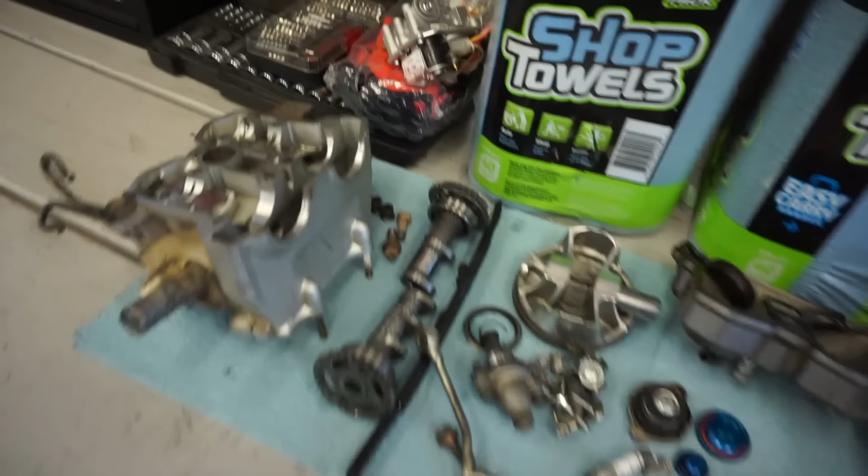Alright, parts finally came in for the 2005 Yamaha YFZ450. If you guys don't remember last video on this thing, we picked this thing up for, I think it was $1,500. Pretty good deal. The guys knew me and they gave me a pretty good deal on it, which was nice of them. They didn't, however, tell me that there was coolant in the oil. And later we found when we tore it down that the cylinder was cracked. So tons of coolant was getting into the engine.

You can see the big crack in the cylinder right there. This was a big bore CP piston. It was just rebuilt, I believe, a couple months ago. I'm not sure what happened, but something happened and the cylinder cracked. So we are going to rebuild it today and see if we can get this thing started for the first time since owning it. We got a brand new kit here.

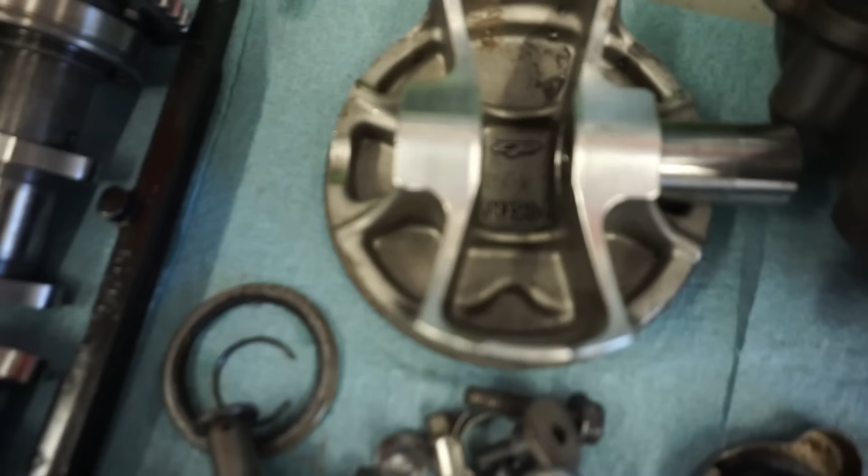It was like 400 bucks for a CP piston. This is the stock bore, 95 millimeter stock bore. You can see that the big bore piston was a 98. So this is 3 millimeters less. We didn't go with the big bore because we measured the cylinder last time and the cylinder wall was so thin that I wanted the stock one just because it was a little bit stronger.

Look at this guy checking out the piston. Do you approve of the piston, Vinny?

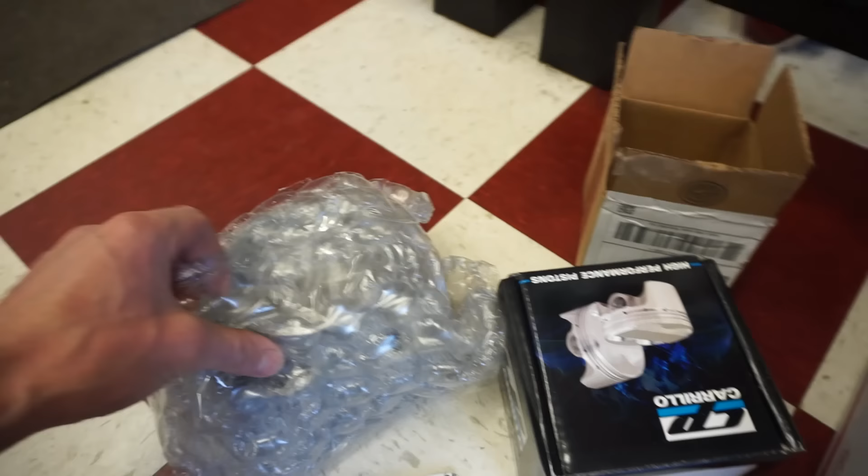And then we got the cylinder and a gasket kit in here as well. Cylinder is actually really nice. I did not cheap out on the kit. Then we got the Cometic gasket kit as well. So that looks pretty good. I don't know why it says 96 millimeters on the gasket kit. That's kind of weird. But here is the cylinder.

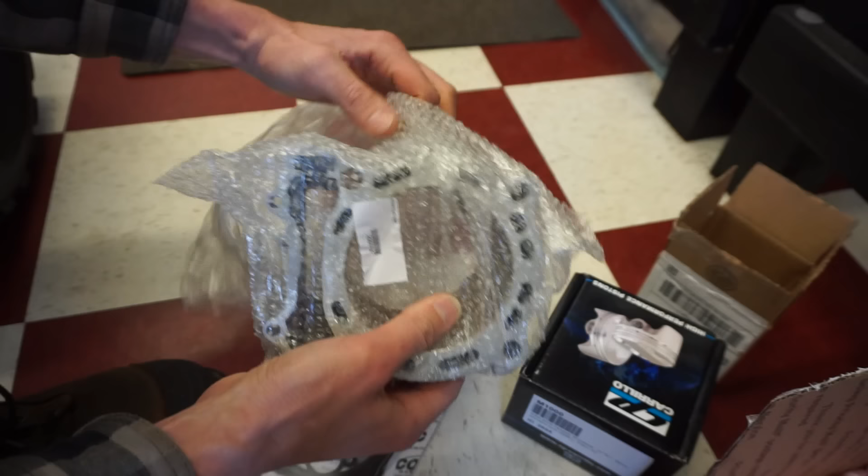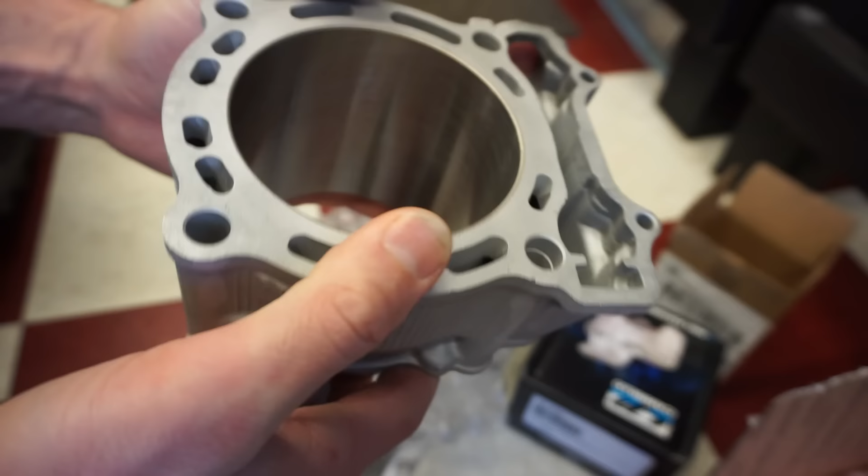The kit came with a really nice cylinder as well. It's not one of those cheap ones you find on eBay for like 100 bucks. This one is actually like $400. Hopefully they sent the right one. Yeah, it's a Cylinder Works cylinder. So it's definitely a nice cylinder. I believe it's already honed out. Yep, you can see all the lines on the cylinder, so that looks really good.

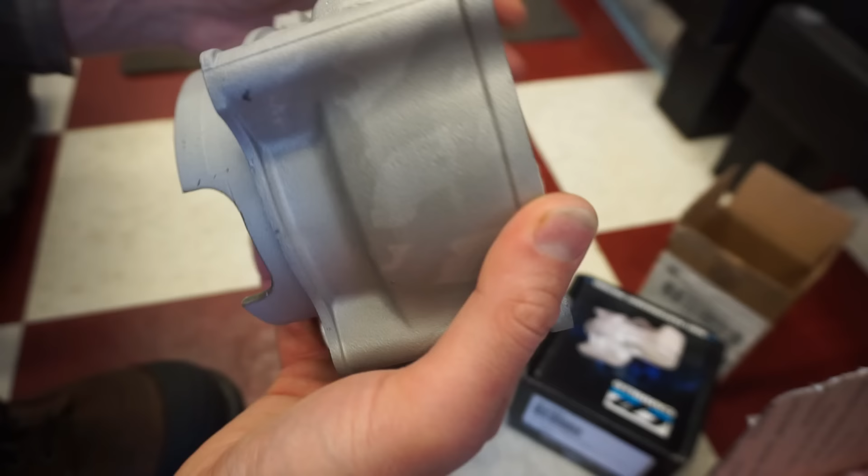And look at the difference between the thickness of this one and the other one. Those walls are so thick. There's no way that's gonna crack. Knock on wood. But that looks really nice. And you can see it actually says Cylinder Works right there. Made in the USA. So you know it's good. So we'll measure the ring gaps and all that fun stuff and get this thing rebuilt. I'm guessing we're gonna have to adjust the valves as well and shim those, but we'll see.

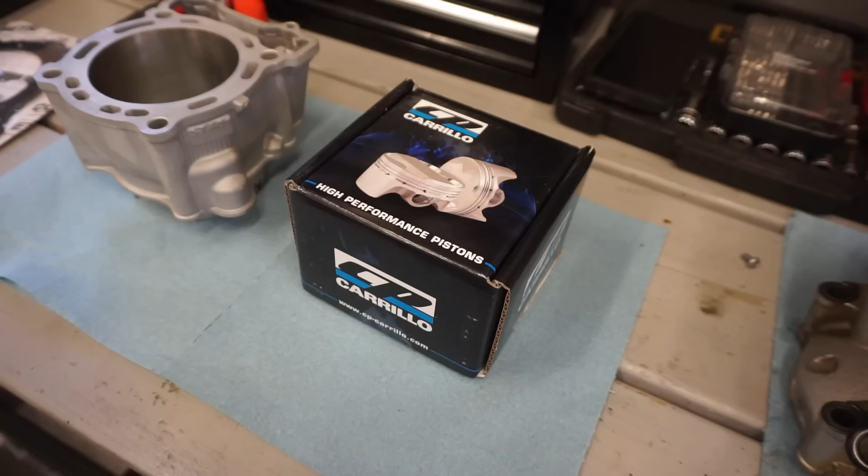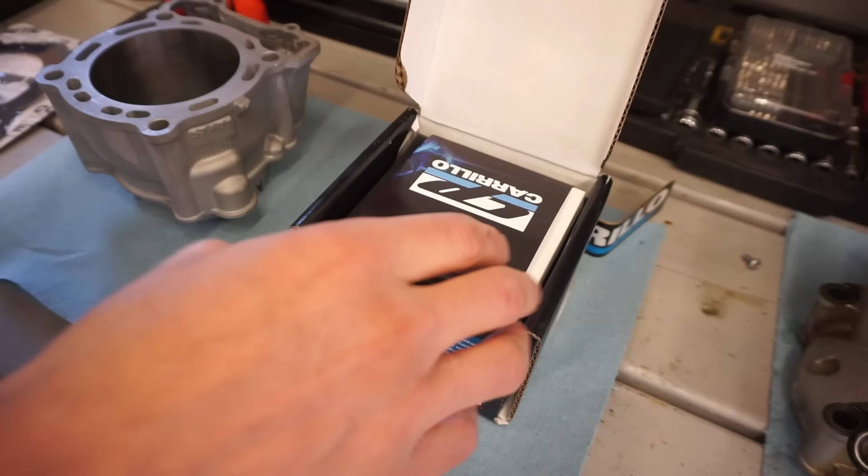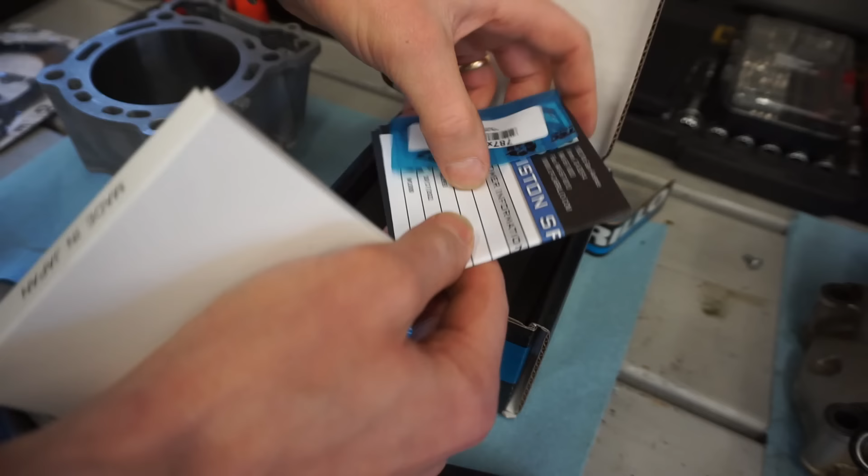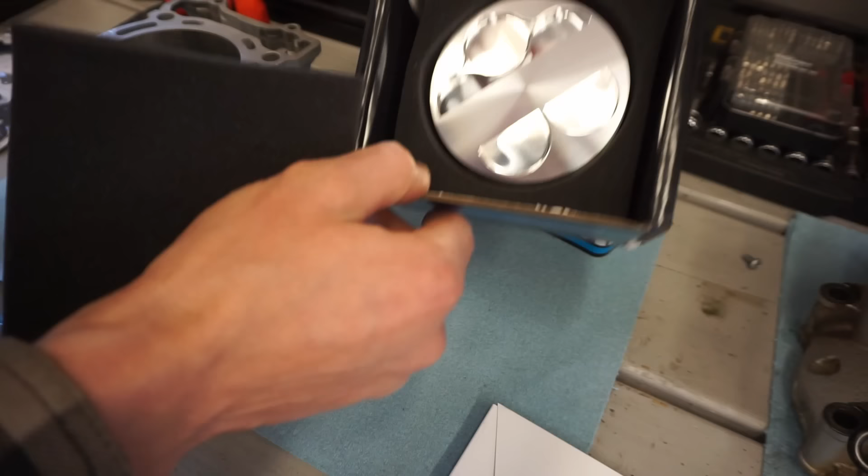All right, opening up the CP piston here. Take a look at this one. Hopefully everything looks good in here. Got the nice sticker. Little packet here. Here are the rings. The rings. There's the piston in there. Looks pretty nice. That is a pretty piston. It says MX94 on it.

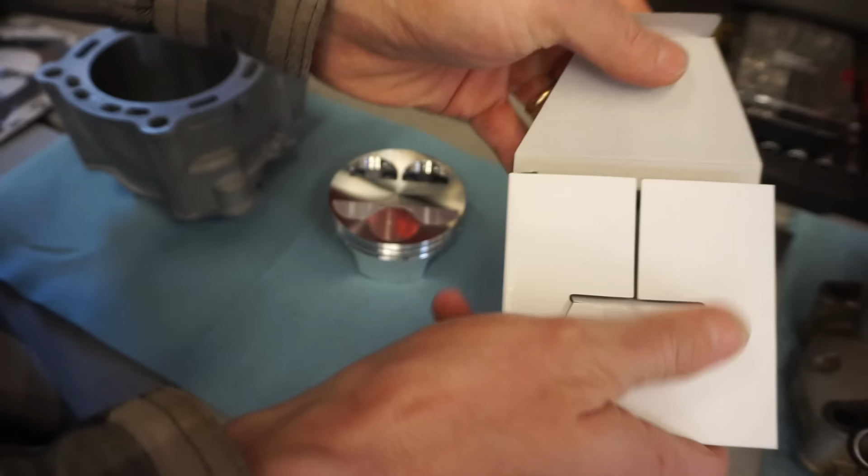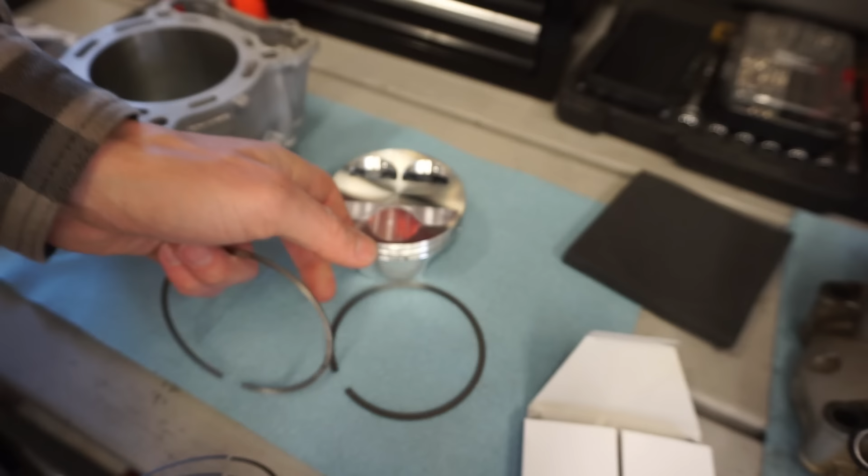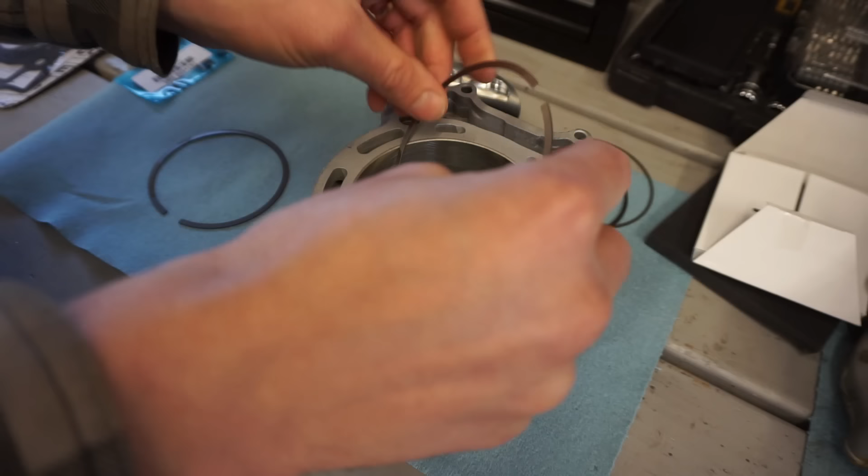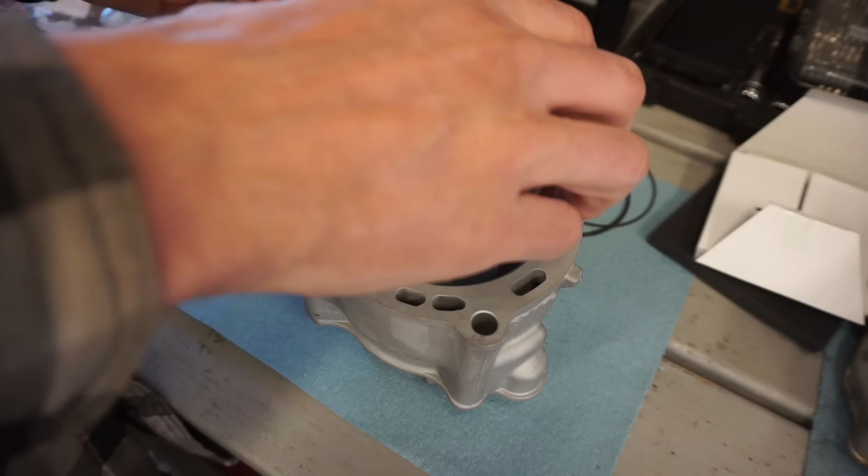So the black ring right here is actually the second ring. And then the piston colored ring is the top ring, and then the oil rings right here. So what we're gonna do is take the cylinder and just measure the ring gaps here quick, just to see what they're at. We'll do the top ring first. Stick that in there. What you do is use the piston. Push down those rings a little bit.

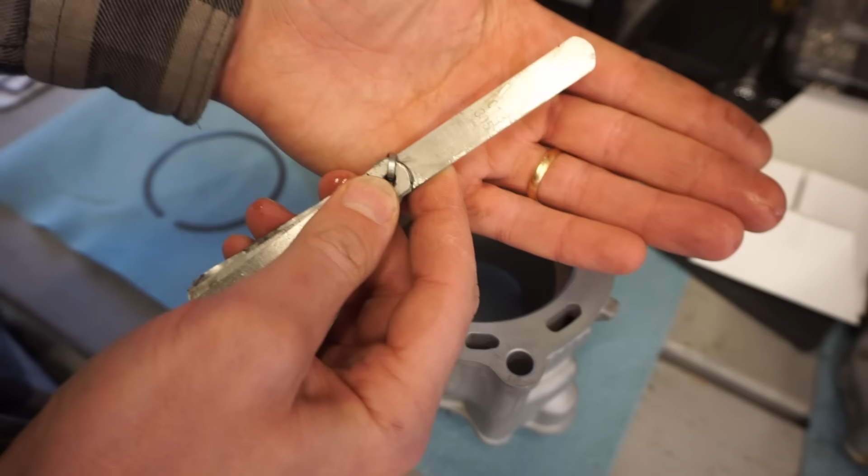And you can see the ring gap right there, so it's nice and tight. See that? Little gap right there. Get our feeler gauge out. This one looks pretty tight, so we should be good. It's gonna be like 12 thousandths, I bet. Yep. Wow, that's almost perfect. So 0.305 millimeters, or 12 thousandths of an inch, is what that ring gap is at. That is pretty much perfect there.

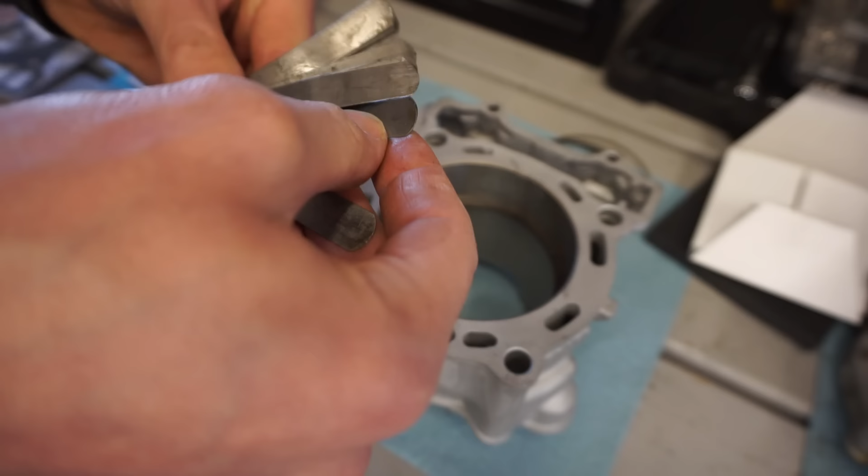Second ring going in. So it's bigger than 12 thousandths. It might be like 15 thousandths of an inch. A little bit bigger. I think it's gonna be 16 or 17.

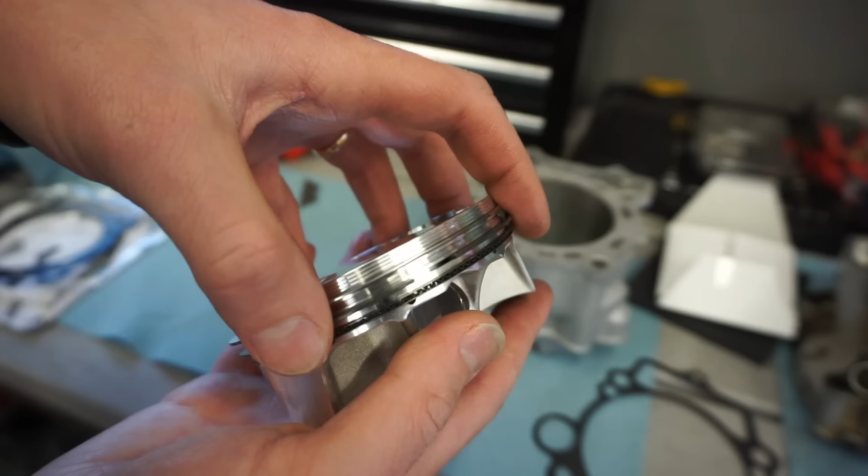Yep, 17. So that one's 17 thousandths of an inch, 5 thousandths bigger than the first ring. So both ring gaps are within spec. I know I've said this in previous videos, but for the piston rings, you want to put them with the, see the N right there? Right there. That is facing up on the ring. And the oil rings aren't marked. Just put those in however you want.

And then when you put the piston on, you want these ring gaps to be staggered. So you want one ring gap to be in the front, like that, so the ring gap right there. Then the other one 180 out, so the other one in the back. So it's 180 out, see that? Other one in the back, one in the front. And then you want to stagger the oil ring gaps as well, so that no oil can leak by, and you won't have a smoking quad. And that's the best way to do that.

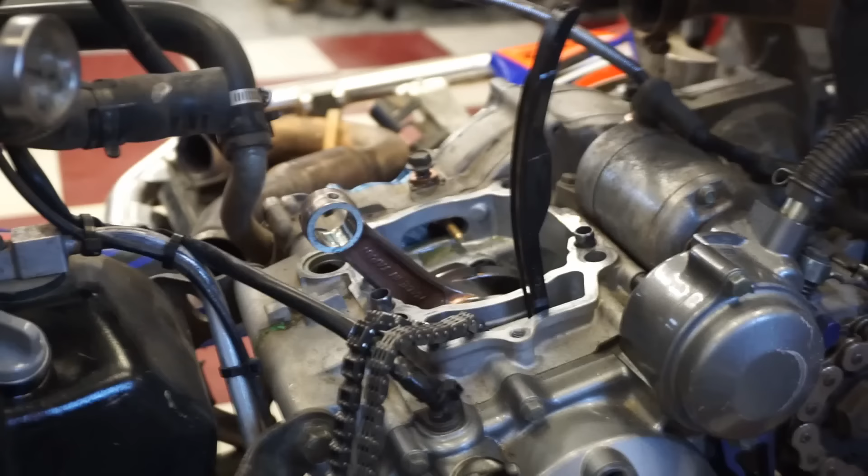So we'll install that. We're gonna lube everything up here, and we'll install that and see how that goes. All right, we sprayed off the surface of the actual engine case here where the cylinder lays and where the gasket lays with brake cleaner, and really rubbed off all the old gasket, and so everything's super clean on there. We also lubed up the rod end, so everything is good to go.

We just have to get the gasket on. And the one that came in the kit is a super heavy duty one. It's actually not paper, it's tin. So it's super good. Typically I would use gasket maker with a paper one, but with this one I'm not going to. And note, we have the 2 dowel pins in already. One right here, one right here. You can see that lays nice and flat on there.

All right, now typically I would change out the cam chain, but on this one it was just rebuilt. So I'm guessing they replaced the cam chain, so it was a full rebuild. So that cam chain's gonna be fine. I mean, this thing probably has like less than 5 hours on it. So get the cam chain through here. We've got our rings staggered.

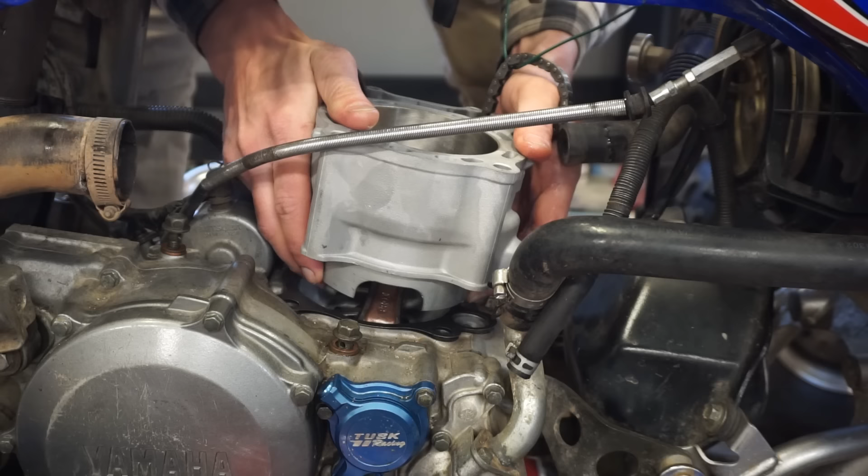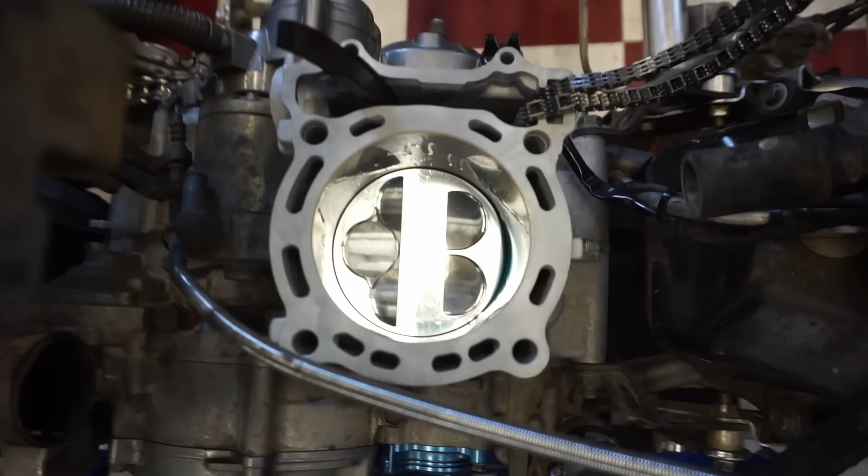All right, piston and cylinder are on. Also note that the piston goes in the way that the valves are oriented on the head. So there's 3 valves in the intake side on the head, and there's 2 in the back near the exhaust. So that's the way the piston goes in. There's no marking on the piston to tell you which way it goes in, so just check your head and put it in that way. But yeah, everything moves smoothly in there. I rotated it up and down, so now we can get the head on here.

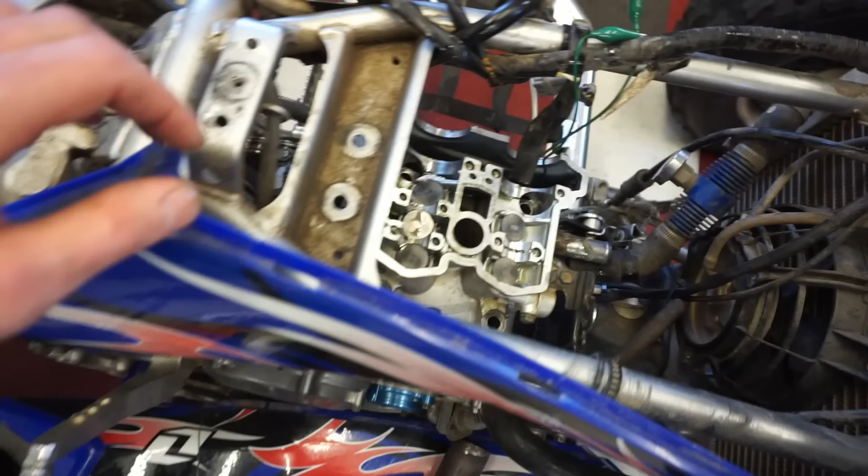All right, definitely fits that way. The gasket here. There we go. All right, head is on. Now we need to get the bolts in here. There's 4 of them. And then those have to be torqued down in the correct sequence. So we'll go over that sequence as well.

All right, so the correct sequence we're gonna be doing is crisscross pattern. And what we're gonna first do is tighten them to 22 foot-pounds. Just starting at one corner. I'm going to tighten these to 22 foot-pounds. We already applied grease to the bolts. And this is just to crimp those gaskets down because they're brand new gaskets. And you want those to crimp down all the way so they seal properly. That's kind of why you go through this step.

That one's done. That one's done. That one's done. Now what we're going to do is loosen them up. So just completely take them out. All right, now they're all loose. Now we're going to re-torque them to, I believe it's 14 foot-pounds. Yep. Just gonna re-torque them to 14 foot-pounds.

All right, those are torqued to 14 foot-pounds. Now what we're going to do is mark each of the bolts with a marker. So we're going to mark them right here, right here, right there, and right there with a marker, just a line. And then what we're going to do is twist them another 180 degrees. So that line right here should be on the other side of the bolt. All right, you can see I marked each bolt with a line with black Sharpie.

So now we're going to twist these bolts around until that line is parallel over on this side with that line. So it's just going to be the opposite, 180 degrees turned. Now we're going to get the cams in.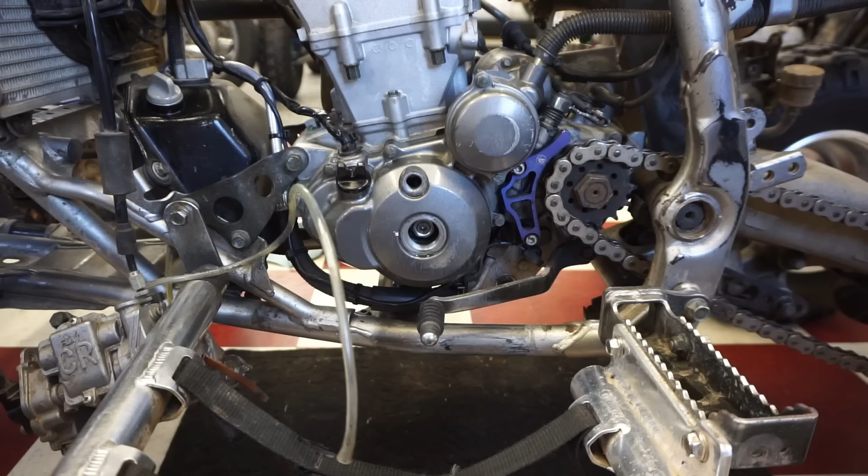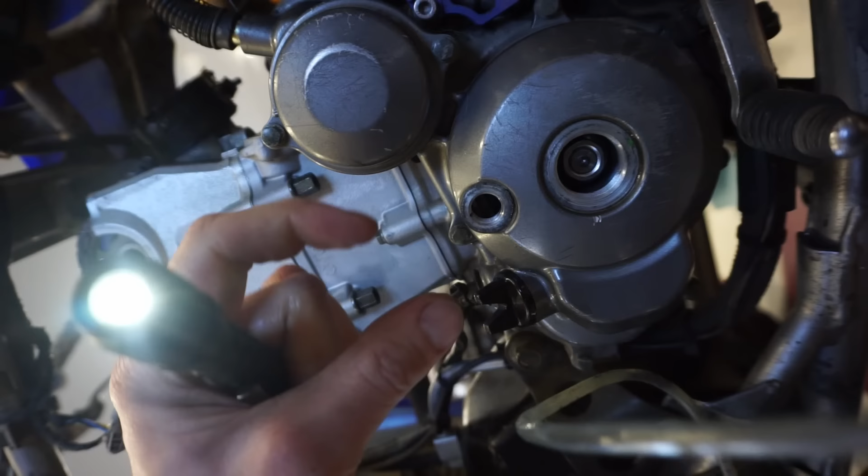So timing, you're going to line up the flywheel. There's a couple marks down here. It's the third mark. So there's 2 marks like this, and then there's a third one all alone. It's the third mark. So we got that lined up. And the cams, you can see, are in here correctly.

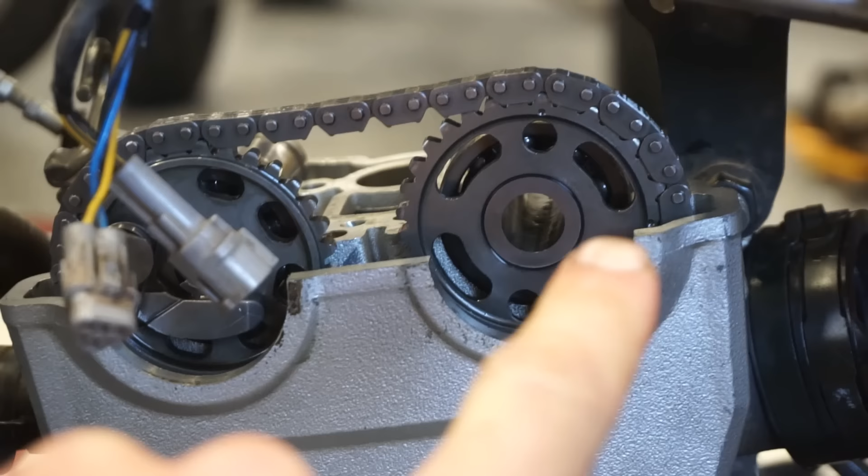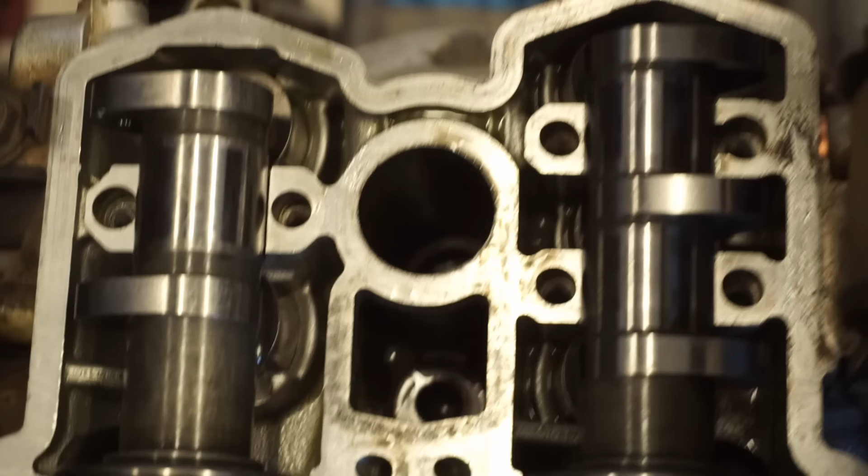So you can see there's a dot right there, horizontal to the head. There's a dot right there, and there's a dot right there. I don't know if that's zooming in. Right there. There's a dot right there. So these dots below have to be lined up with the surface of the head, and we are perfect. And your lobes will be pointing away from each other. So these pointing that way, and those three are pointing that way.

All right, so we've got the intake cam on and tightened down. I just measured all the valve clearances right here. They're all within spec. Spec is 0.004 inches to 0.006. These two are 0.006, this one's 0.004. So we are within spec on that one. This one, the cover doesn't even go on because that shim is way too big. I'm not sure about this one because we couldn't get the cover on.

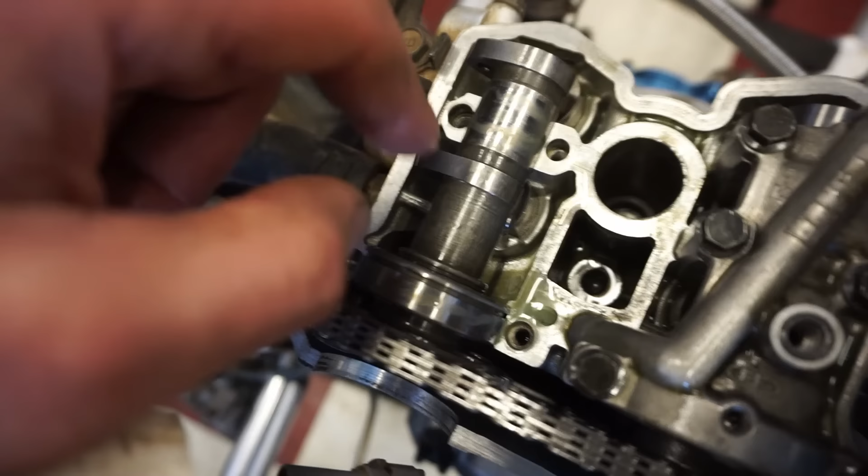So we have to take this cam out, then we've got to take that shim out and replace it with a different shim. So let's do that. Let's see what kind of shim was in there. Here's our calculation for the shim, the new one. So we ended up taking these old ones out. These were way too big. I couldn't even put the cap on the cam to hold it down. So we went way smaller. We went to a 1.11 millimeter

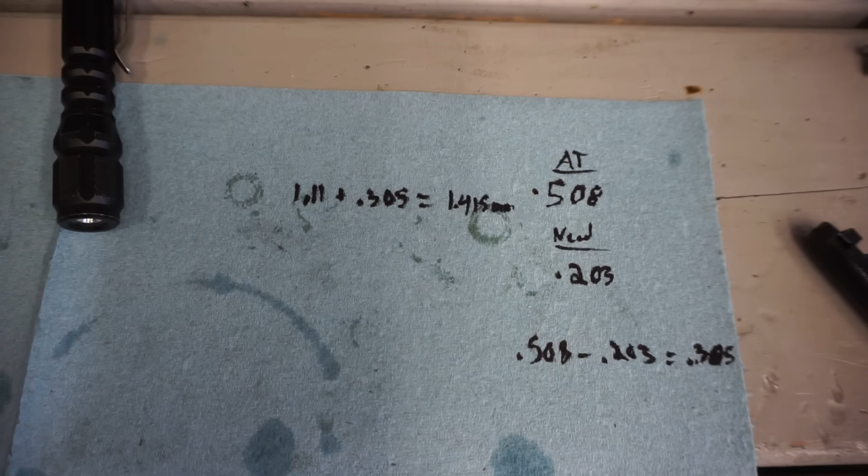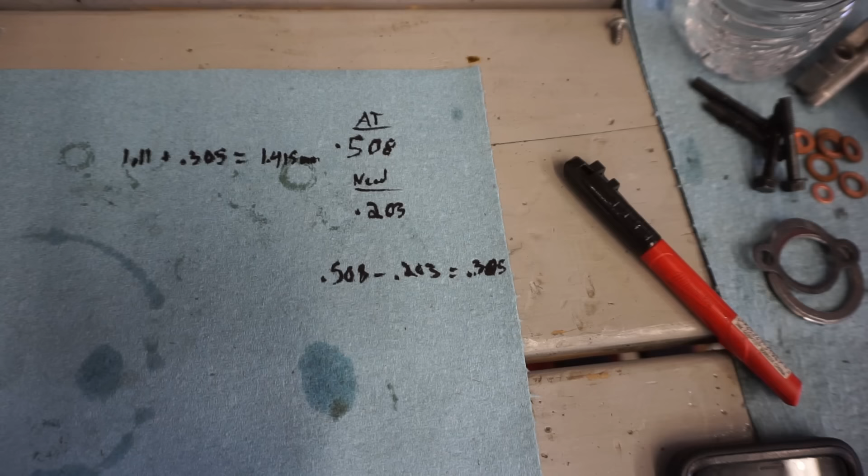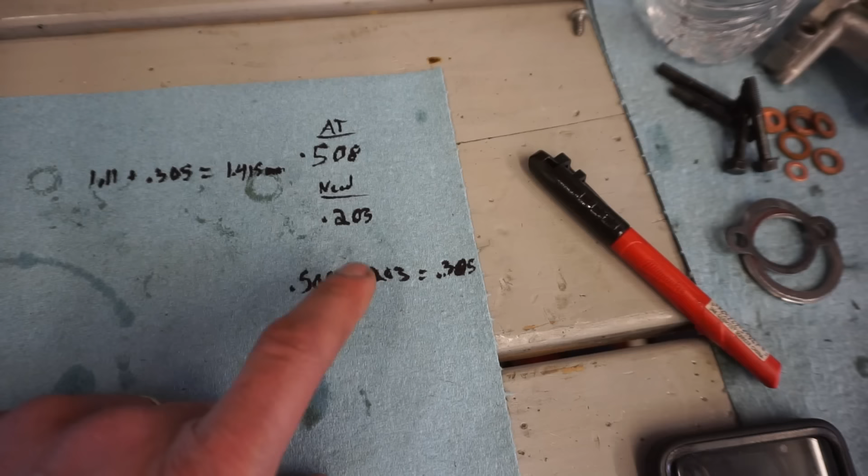shim. And I put the cap back on, tightened it down, and then we were getting readings at 0.508, which is 20 thousandths of an inch. So that's way too big. We need to be at 8 thousandths, which is 0.203 millimeters. So that's what we were at, that's what we need to be at. So we subtract 0.203 from 0.508. We get 0.305 millimeters. So that's what we need to make up in the shim. That's what we need to add to the shim so that we get a smaller clearance.

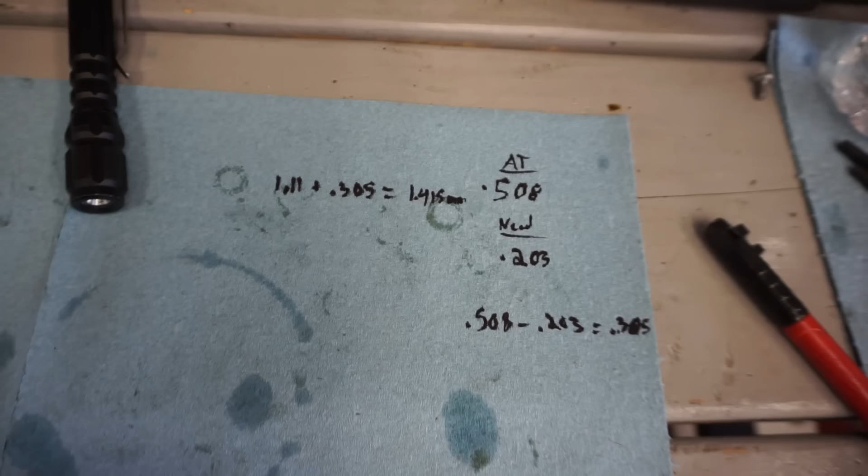So the shim we put in was 1.11 millimeters, the really small one. So we needed to add the 0.305 millimeters, which is that amount right there. And the new shim size is 1.415 millimeters. So we look in the shim container right here, and we pick out a 1.4 millimeter right there. We're gonna measure that with the caliper. A lot of times these are off, so measure them here.

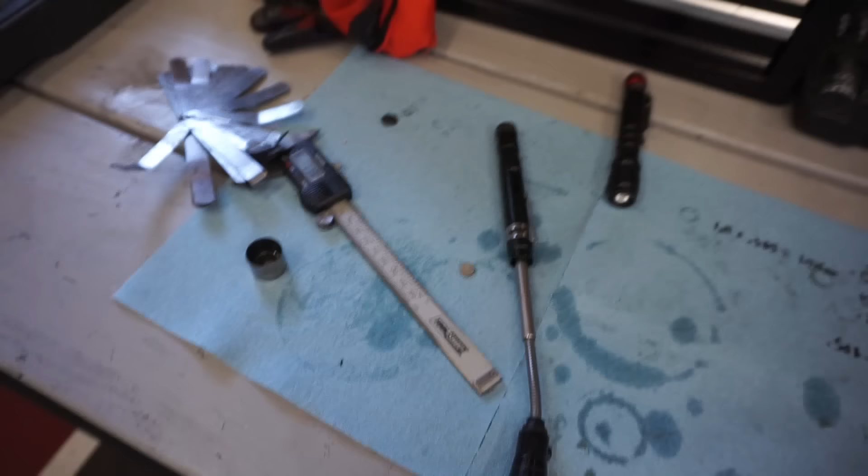So we're at 1.36, 1.37. So we're gonna go up one size to the 1.45. And that's pretty dang close, yep, 1.4. That's where we need to be. So we're gonna put this shim in and then try this all over again. All right, valves are perfectly within spec. These two are 0.008, so we are perfectly within spec. And now let's get the cam chain tensioner in.

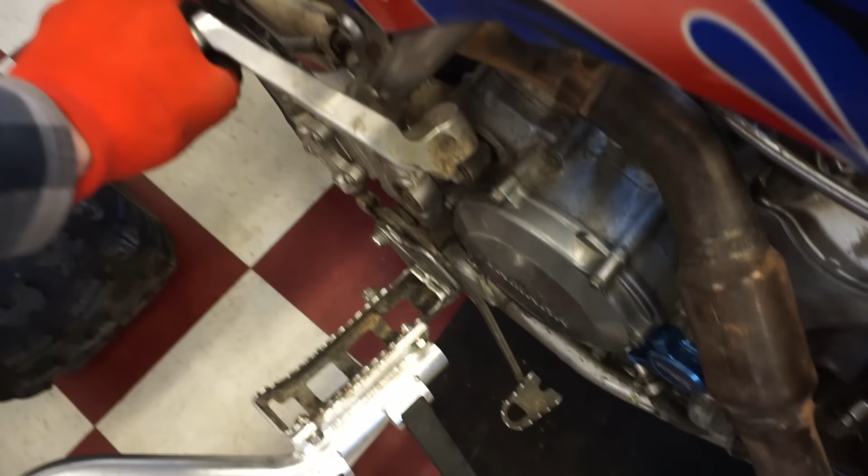All right, the whole engine is back together. We've got the header pipe on. Everything is looking awesome. Turns over smoothly. Good compression there. That feels good. We're gonna take a look at the carburetor. This was big bore before, so I wanna see what size jets they had in it.

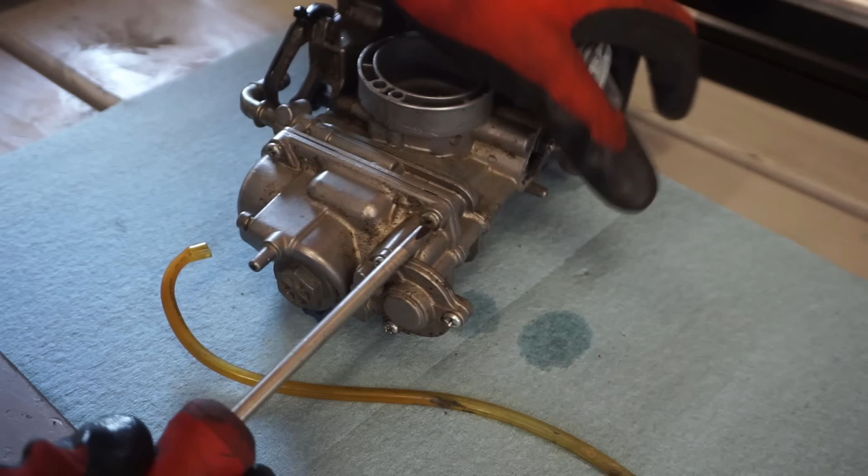Some gas in there, a lot of gas actually. And we'll do a quick carb clean too, because this thing's been sitting for a while. Gotta take out this guy. Looks pretty clean in there. Got the gasket here.

I'm sure they probably went through the carb after the rebuild. Looks like a new jet in there. Let's see. 172 for the jet. So they did rejet it. You can see, 172.

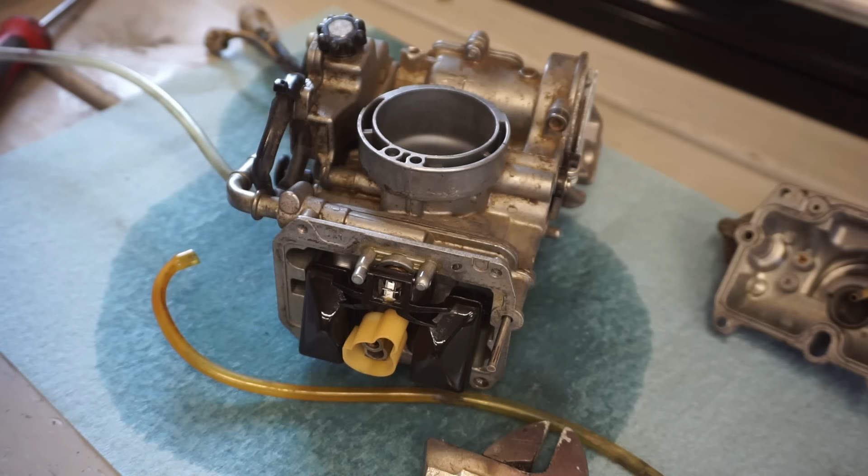Float and the needle out. Needle looks good. Float looks good. So far everything is looking pretty good. Here's the spring for this guy.

Alright, let's see what they have for the pilot. We'll have to see what the stock jetting is. 50. And that's clear. So it's 50 pilot in there.

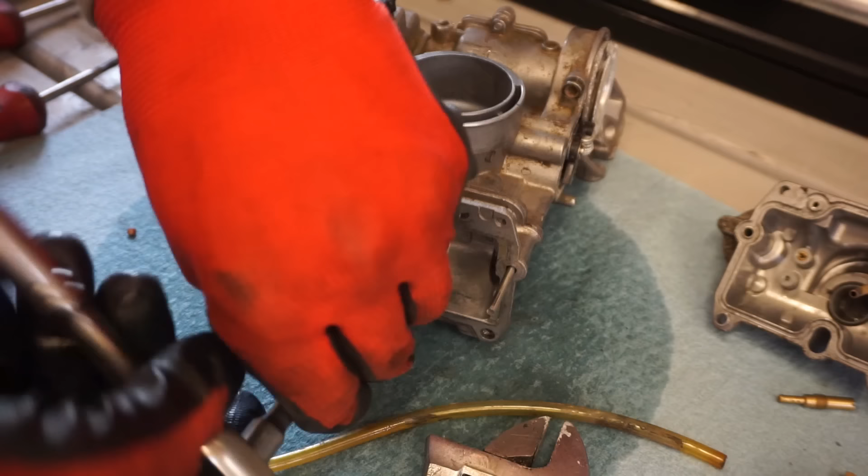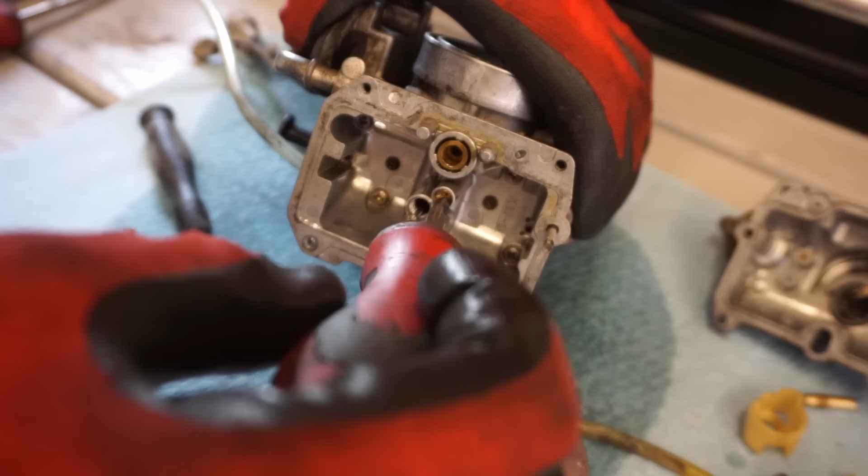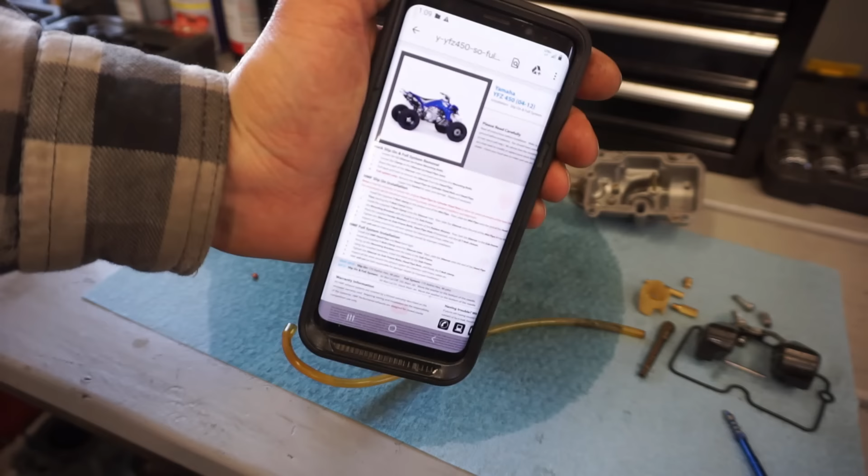So the HMF website, right here I'm on it, for YFZs recommends that we run for a full system, which is what we have, a 175 Keihin hex main jet and a 48 pilot. We're at a 172 for the main and a 50 pilot. So we're right in that range. So we're just gonna leave it like that. So they rejetted it correctly, but I don't think they took into account the big bore. I think it would need to go higher up in jetting with the big bore. But since we're the stock bore, we're going to leave it the same. All right, let's get some coolant in here.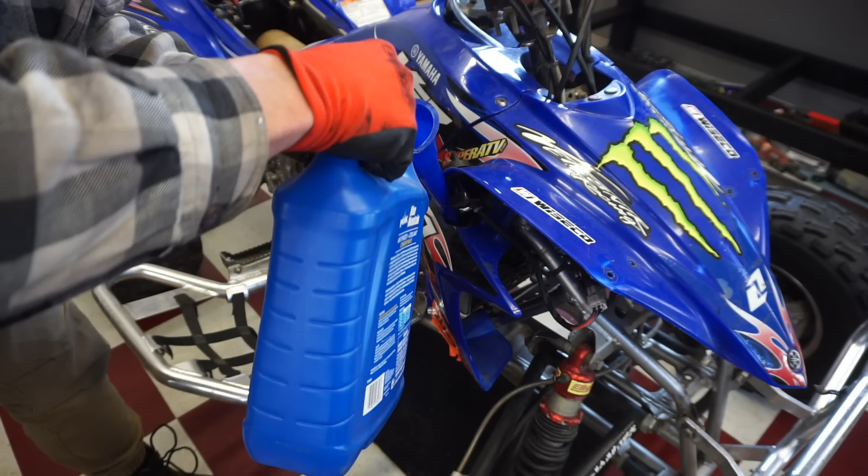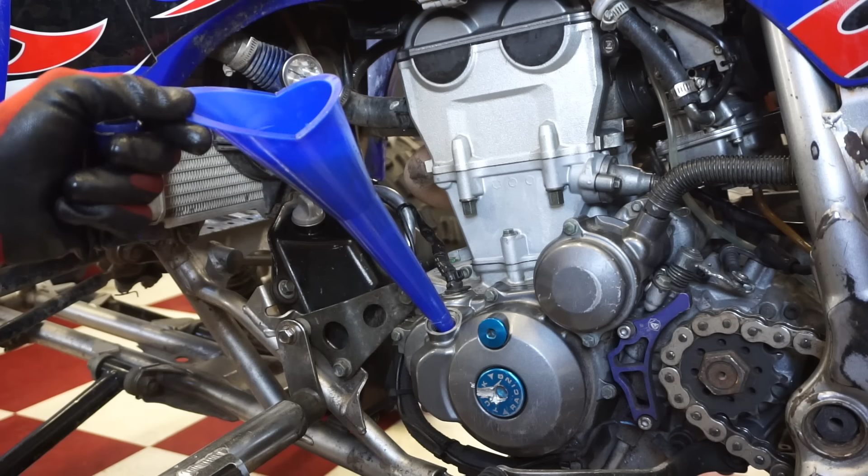All right, coming over to the left side, we're gonna do an oil change on it. Since we replaced the filter, you need a little bit more oil in here. So we're gonna do like maybe 0.3, 0.4 quarts of oil in the actual engine here. Then the rest we'll put in the oil tank. And then we're going to put the rest in here. It takes about 1.98 quarts. So we're just going to put 2 in. Then we'll start it up and check it. We'll see what happens here.

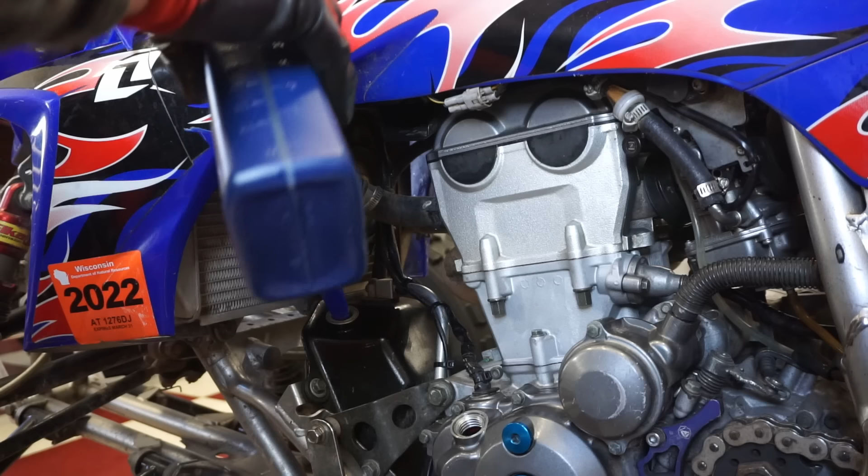All right, here we go, moment of truth. Will it fire up? We're gonna use the electric start, if that works. And we'll put the choke on. See if she pops over here. Oh, also the battery is missing the screws for it, and I ran out, so we're using the jumper pack.

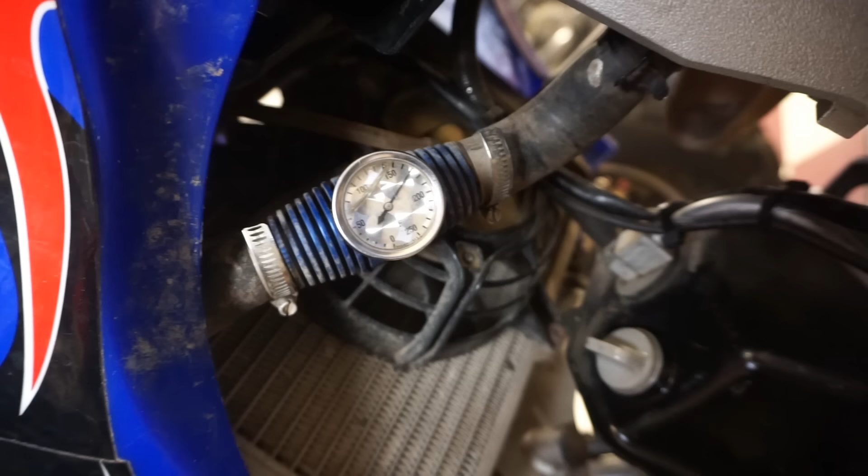All right, let's do a quick startup. And then there's a temp gauge in line with the radiator, so we're gonna check that once we get this thing up to temp. Just see what it's running at. All right, coming down here, you can see the temperature is 170 at idle. Looks like it's coming down a little bit now. But yeah, I guess that's pretty hot.

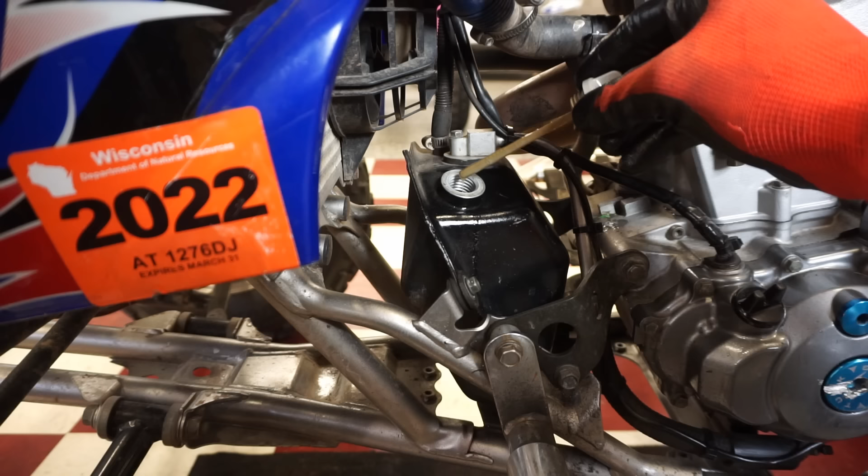Let's quick check the oil, make sure that's all good. Make sure it's not milky. It might be a little bit milky because we had leftover coolant in here from before, but it shouldn't be super milky. Let's see here. It's just gotta mix with the fresh oil. It's pretty milky, so we might have to do another oil change on it. You can see it's getting all that old, crappy, coolant-filled oil, and it's circulating it through the system. So we'll probably run it like this for a little bit, then do an oil change and make sure all that coolant's out of there.

All right, got it all back together. Battery's in, everything's working. Thing is looking awesome. It's a really, really clean machine. Absolutely zero leaking from it. Thing is ready to rock and roll. So we're gonna take it for a little test drive just around the yard, and then we'll take it to the land. But I just wanna see if it goes and revs out all the way. We've had some problems in the past with the mid-body carburetor gasket. So I wanna make sure there's nothing wrong with the carb.

Idling for like 5 minutes, so no smoke, no overheating, pipe is good. Yeah, it's running good. Revs out all the way. All right, first test drive went pretty good. Everything checked out. I just was going slow in first gear, just kind of revving it out a little bit just to see if it would go, and it's like a rocket. It's crazy. The response is actually pretty good for being a, what is there, a 50 pilot in there? I thought that was gonna be too rich, but it's really not too bad.

You can tell it's a little bit rich because you can smell some gas coming from it, but other than that, it's not bad. I'd rather have it rich than too lean. So I'm gonna keep the jetting just like that. If we hear popping or backfiring, we will mess with the jetting. I'll bring some jets along, and we'll maybe mess with the main or the pilot. I think they're gonna be pretty much in that range. So I think it's running pretty good. And it starts right back up. I mean, instantly.

That pipe is really loud on there, so I'm sure the neighbors love that. But other than that, it's running awesome. No leaking from anything. The pressure coming out of the pipe is insane. It just blows your hand right off the pipe, so compression must be pretty high. But tomorrow we'll break it in and really send it, see what she can do.

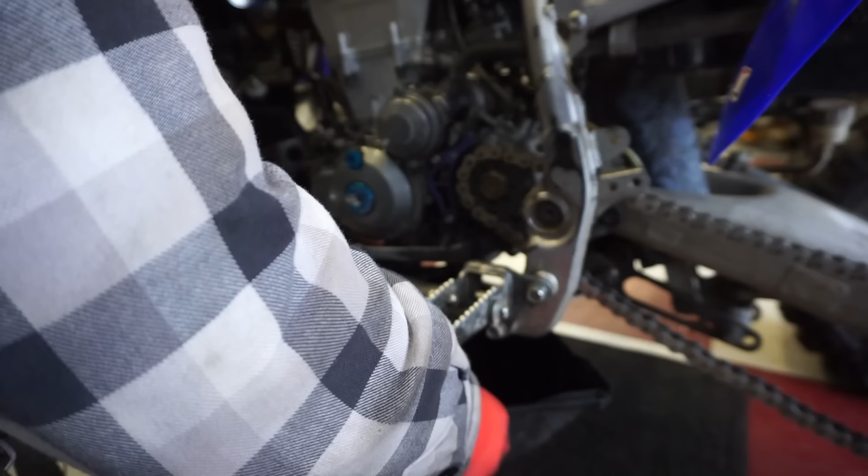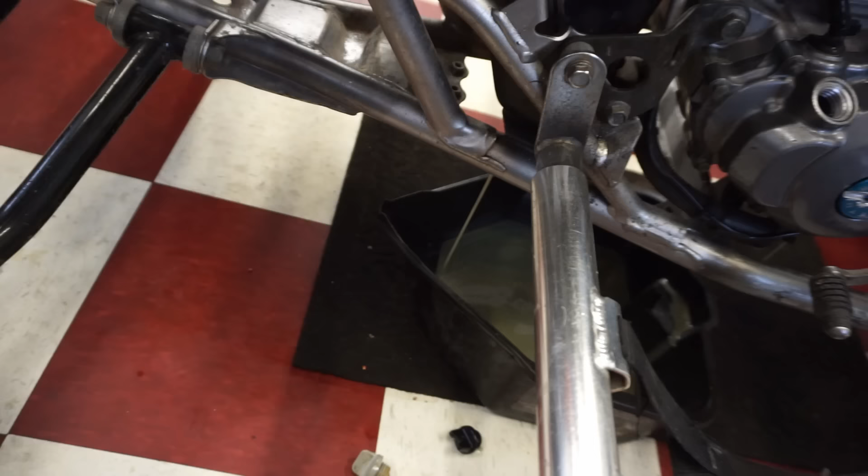You can see how milky that oil is in there coming out. So hopefully we don't have like a water pump failure or something. Hopefully that's just from the residual coolant from the engine. All right, tank, same thing, really milky. So hopefully one more oil change does it, because that oil is not super cheap.

All right, made it up to the land. It's super foggy today, so we gotta be careful. Full sending it. There's a bunch of rocks in the field. We don't wanna do what we did last time. So yeah, here it is. Let's get this thing unloaded.

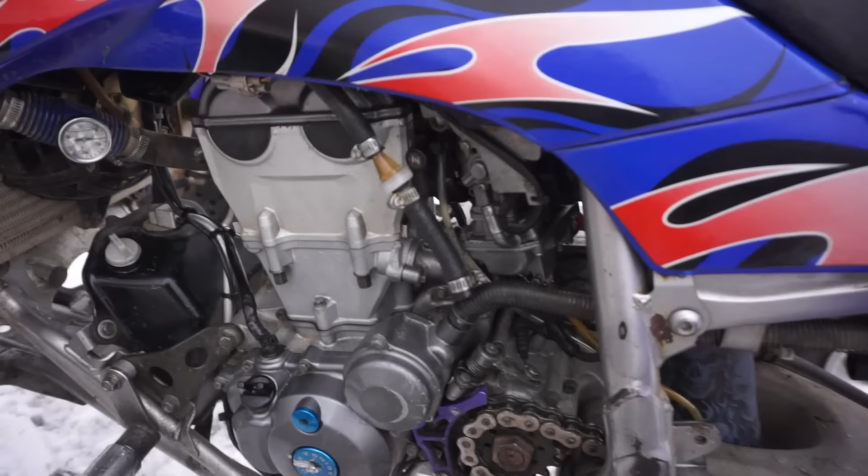Alright, this thing's running great, no leaking whatsoever. Sounds really good, except one thing, the idle is hanging up a little bit. Sometimes it goes down, sometimes it goes up. I'm thinking the slide's getting caught in the carb. I checked the gas flow is good out of here. I can hear it hit. Watch this, we'll start it up and I'll show you guys what's going on. Alright, just get a quick start up here.

Revs out of control. Revs up really high. So I'm gonna mess with the carburetor settings a little bit here, but I have a feeling like the slide is moving up and down randomly. It almost seems like it's starving for gas. What do you guys think? Alright, I adjusted the idle down.

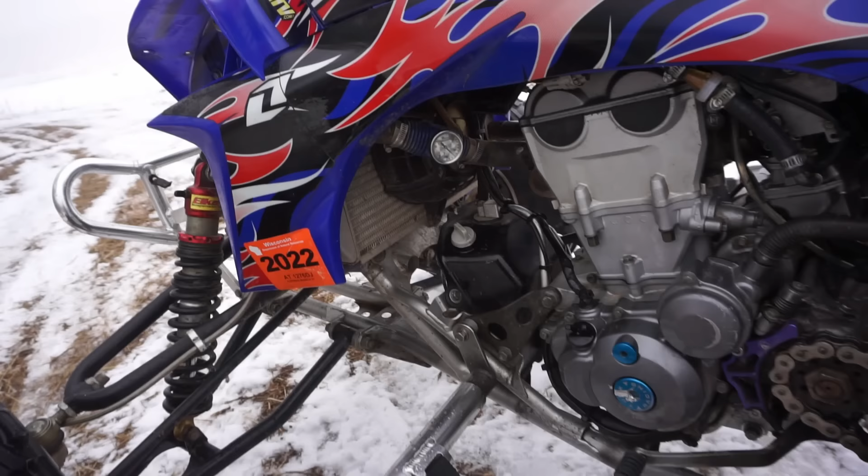See? Oh, the fan came on. We're at 220 degrees right now. Well, we know the fan works. But yeah, it's running kind of weird. I think it's the slide in the carb. So we'll have to tear that apart and just see what's going on in there. I might replace the mid-body gasket as well. But other than that idling problem, this thing is great. Oh, fan turned off.

So that wraps up today's video on the 2005 Yamaha YFZ450. We got this thing with low compression and a cracked cylinder, and I rebuilt it, and now it runs great. So it wasn't too bad of a fix. I think we paid maybe $440 for the kit. So altogether, I think we're in like 1,900 bucks. So it wasn't horrible.